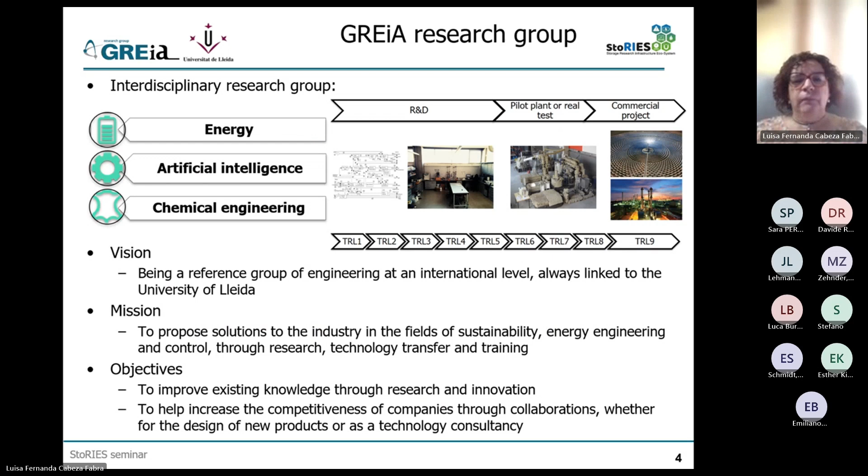These are our capabilities. I don't want to go into detail here, but you can see that we do a lot of things. And although we also look at other applications, thermal energy storage has always been our main drive.

So let's start with the presentation itself. I will talk a bit about thermal storage and their technologies, and then the role of this technology in the energy system, because I think it's very important to understand how this impacts things, and how the materials need to always take into consideration this application side. And at the end, if we have time, a bit about sustainability and social aspects - both of them, but especially sustainability, again, because it's very much related to the materials.

So we need to think a bit about the energy system. We need to remember that the energy system has three main sides to it: production, where we produce the energy carriers that we will use later - and here is where renewables are starting to have a big role, trying to substitute the fossil fuels that by excellence have been oil, coal, and gas. Then we have the distribution and transmission side of our energy system, which is where we transport this energy that we produce somewhere to the demand side, which is where our final users are.

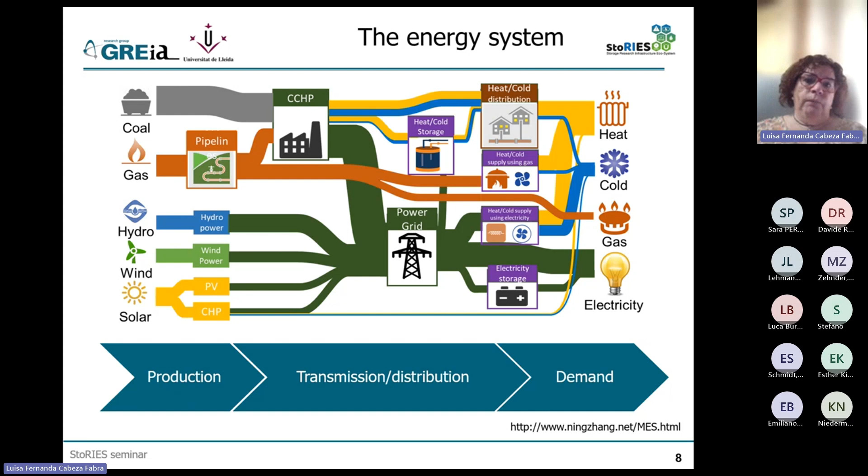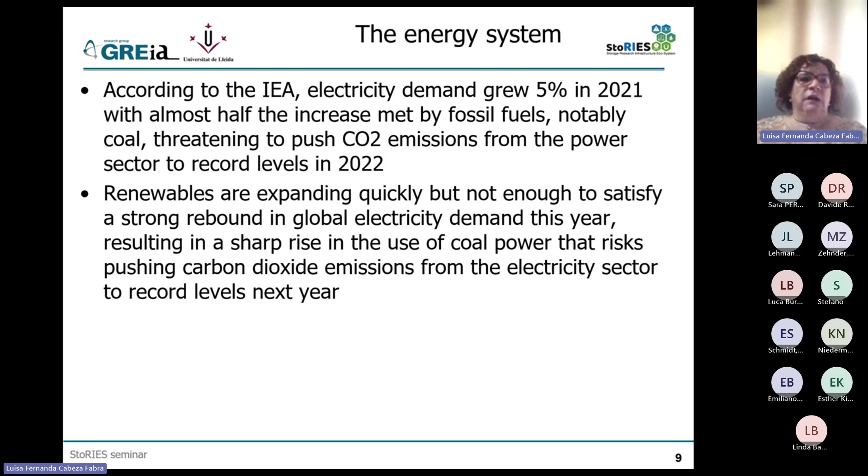We all know about this - I'm going to go quickly - but all of these technologies on energy storage, and also thermal energy storage, are being pushed very much by our energy transition towards renewables, and the problem they have is that they are intermittent.

Also, we need to remember about all our targets that we have in Europe, but also worldwide. The European Green Deal is just one example developed in Europe, but I think a lot of countries all over the world are also going into this decarbonization of our system, and also of the energy system. Again, if you read here, what are the goals of this - being the European Green Deal just an example - it talks about secure and affordable energy supply, but it also talks about energy efficiency.

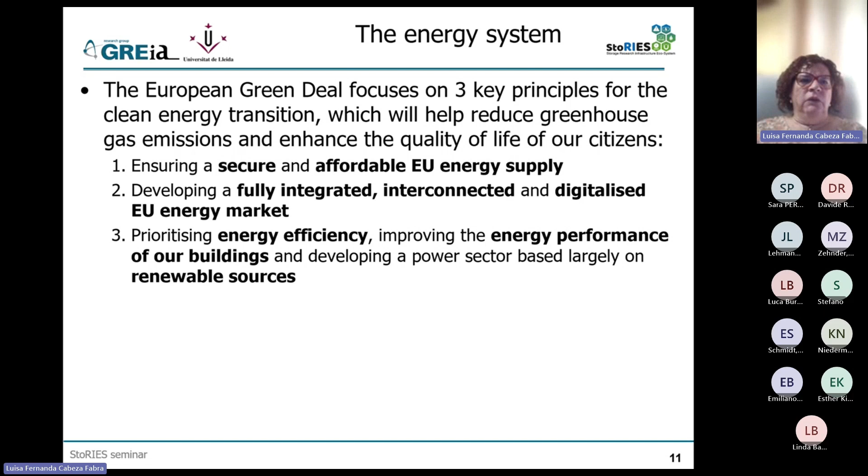It talks about energy performance of buildings, and therefore behind it - and that's why it's called Green Deal - there is all this concept of sustainability that, again, we need to consider when we work with our materials.

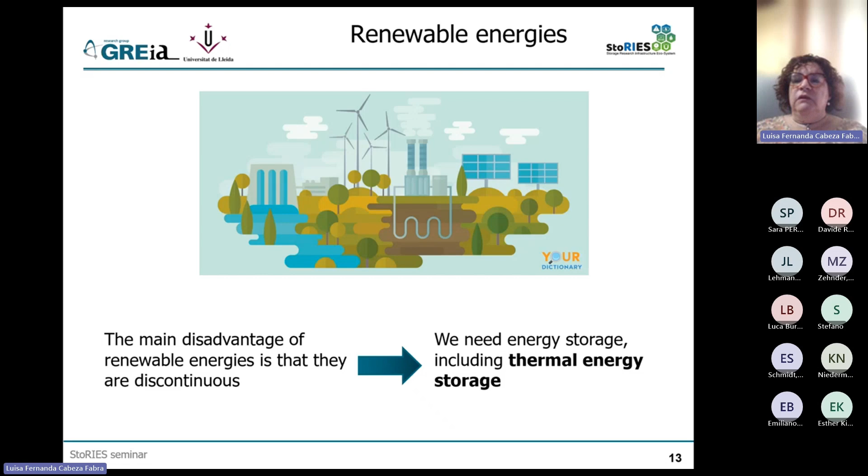This image shows you this transition that we want to do. As I said before, the main disadvantage of these new energy sources we want to use, which are renewables, is that they are intermittent and discontinuous. That's why thermal energy storage comes into place. But this is not the only application of thermal energy storage, of course.

So what is in fact thermal energy storage? I would say that thermal energy storage is what we are more and more using, a heat battery. So it's a battery where instead of electricity, what I save there is heating or cooling. It's heat or cold, so it's thermal energy.

The individual technologies, as I said, can be used in different steps, but they also can be used in different temperatures. That's what we all think, since we start talking about thermal, we think about temperatures, and then we talk about low temperature, medium, and high. Of course, what we call low, medium, and high depends a lot on the application. So in a building, high temperature is around 120 degrees C, but if I'm thinking about an industry, high temperatures can be as high as 1000 degrees C.

Also, thermal energy storage has an impact in the time that I store this energy, and this is where concepts like seasonal storage appear. So maybe in my building, I will save the solar energy from the day to be able to have a shower late in the evening or early in the morning. That's short term, daily. But it could also happen that in my building, what I want to do is store the solar energy from summer for the heating in winter. This is what we know as seasonal storage, which would entail weeks or months of storage. As you can imagine, the technology and the material used in these applications are completely different.

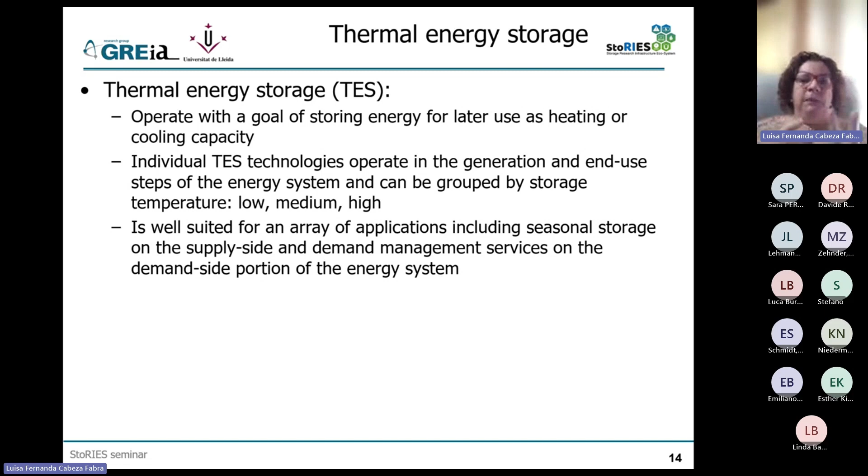Another very important principle of thermal energy storage, as in any other storage concept, is that you need to remember that you need to supply this energy into your storage and remove it. And here is where the concept of power comes in. How fast can I save this energy? So how fast can I charge my tank? Therefore, how fast can I charge my material? And how fast can I discharge it.

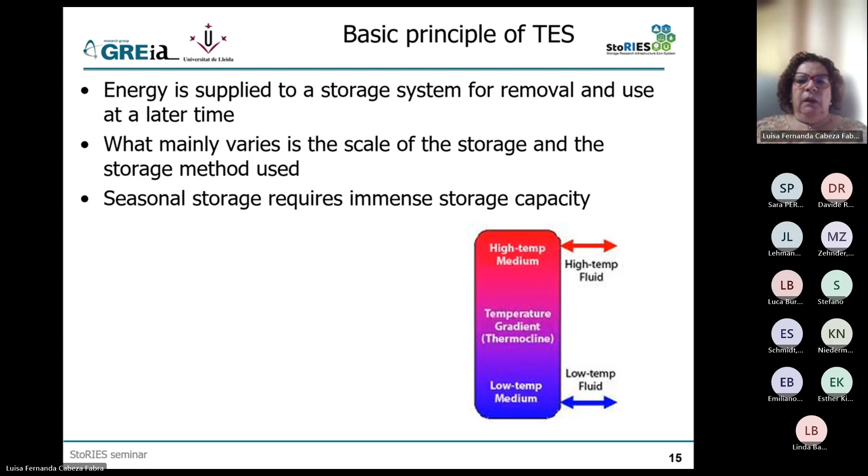And this is what we are showing here. I always say that when we talk about materials, we remember only about the middle part in the storing, where really the storage material is, and where, of course, the selection of this storage material is very important. It also is what gives my energy density. The energy density is how much energy I can store in my tank. It's related to the material itself, to the properties of the material itself. We will see which properties later.

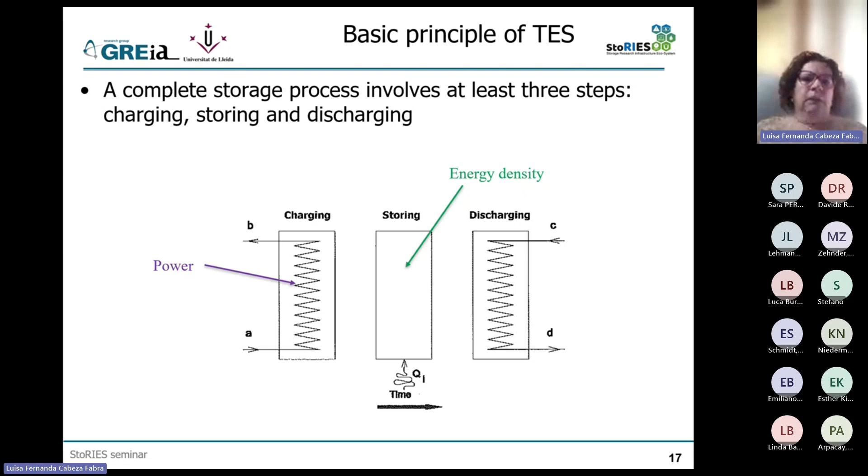But remember again that you need to charge and discharge this material, and how fast you can do that is what gives you the power of this system. In some applications, like a shower, in domestic hot water, power is very important. When I go to the shower and open my hot water, I want to have hot water immediately. While in other applications, for example in a building, if I put my material in the walls to just keep the room at a constant temperature, there I don't want power. There I like that the material stores and releases the energy slowly. So, again, when I select my material and develop my material, and when I write the requirements of my material, it cannot be done in a general way. You need to always think about which will be the application of this material at the end.

Why thermal energy storage? There are other energy storage technologies, other energy technologies in general. But thermal energy storage has some benefits that make it very attractive for engineers and for all of us. One of the known benefits is that you can increase the generation capacity of a system without really changing the system itself. Because if you are able to generate more energy and save it to use it later, maybe because there is a mismatch between the time of the energy supply and demand, with storage you increase your generation capacity without even changing your generation or your demand side of the system.

The better operation of cogeneration plants is a well-known benefit, but I think it should be extended to most other energy plants. Having a storage can help you in modulating the energy temperature, modulating supply or demand, and it really helps in the better operation of energy plants in general.

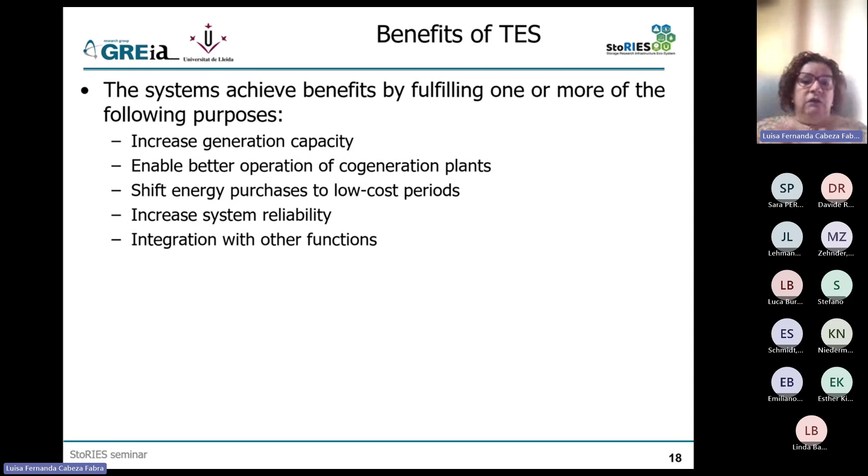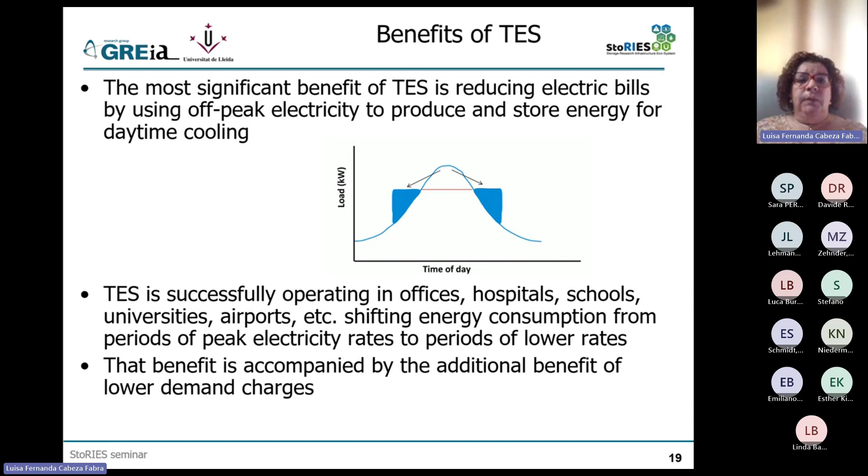This is the peak shift I was talking about, where I change demand from one time to another. If you look at the figure in front of us, this also means I can reduce the size of my producing equipment. Instead of having my cooling power concentrated in 2 hours, which requires very high power, I can produce it over more time during other hours of the day. That means I can use equipment with less power for more time, and therefore not only is the operation cost lower because I use electricity at a cheaper time, but also the investment costs are lower. So we reduce not only the OPEX, but also the CAPEX.

So if we're now convinced that this technology can help us, let's go to the technologies themselves. There are 3 technologies in thermal energy storage, and they are actually very different in how they work and the materials they use. Some of them can be used in the same application, but not always, and especially their use differs.

The most known one is sensible thermal energy storage. Here we just heat up a material to save heating—you can do the same with cooling. The amount of energy I can save is completely related to two parameters: one is a property of the material, the specific heat, which is the energy a material needs to be heated up by 1 degree C, and the other is the delta T. The higher the temperature difference between the beginning and the end, the higher the amount of energy I will save. The most known example is heating water, so water tanks, domestic hot water tanks.

But today it's also a technology used commercially, for example in concentrated solar power plants with a technology called molten salts, where what we are heating is not water but a mix of salts that undergo a higher temperature change, for example from 200 to 500 degrees C. This is also starting to be used in industry, as we will see later. So as you can see, we're starting to talk about very different materials and the way they behave—one thing is to heat water, and another is to heat and cool a salt.

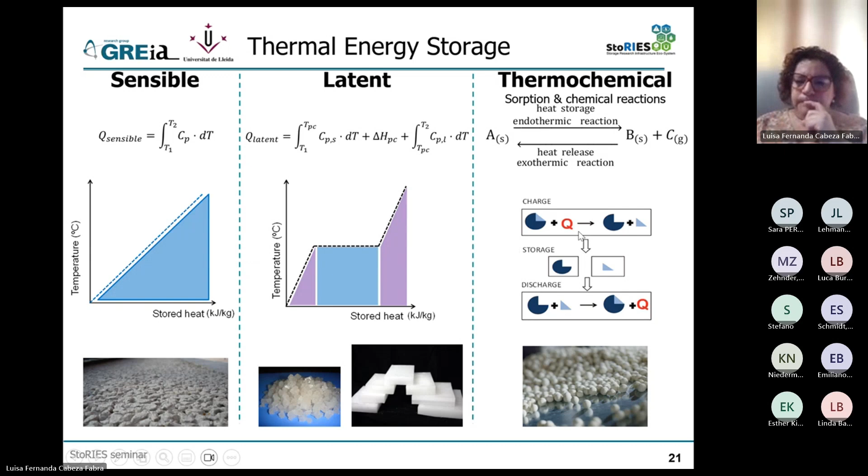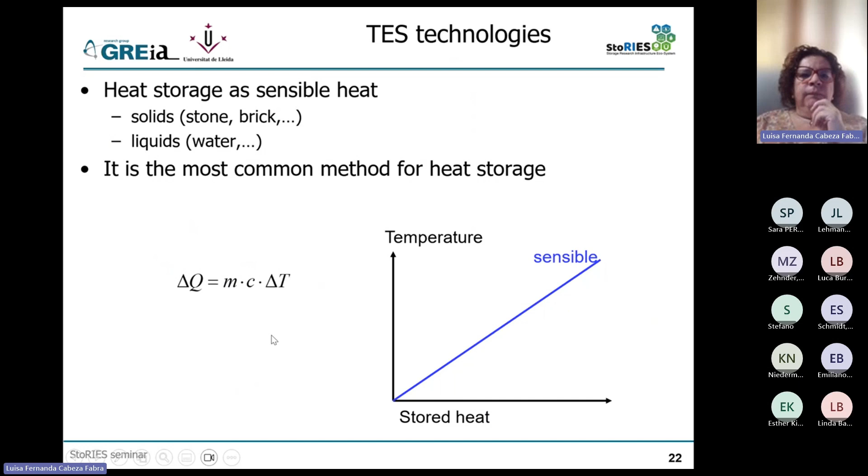Okay, this is what I said. I wanted to use that slide because it helps in comparing, but here you have more detail about the sensible examples with solids and liquids, and the equation we use to calculate the energy density of my storage. And here again, some examples, some which are commercial.

In sensible storage, for example, there is what's called underground thermal energy storage, where we use the soil as a storage material to save energy. Of course, here as researchers, from the material point of view, you could tell me, Luisa, there's not much to be done, but there is still a lot to be done in the wells that we do, especially if instead of aquifers we use boreholes, in the material of the borehole, to achieve the best heat transfer, the power of charging and discharging from my huge storage system, which is the earth itself, to my heat transfer fluid, which is what will move this heat or cold from the storage to the application, which in this case is a building, but it could be others.

Another known system for sensible storage is what's called pit storage systems. Here actually it's usually either water, or when we say pits, it's not only a big storage tank, but a big storage tank with gravel inside, so that the material is more dense and you avoid some of the problems of having only water.

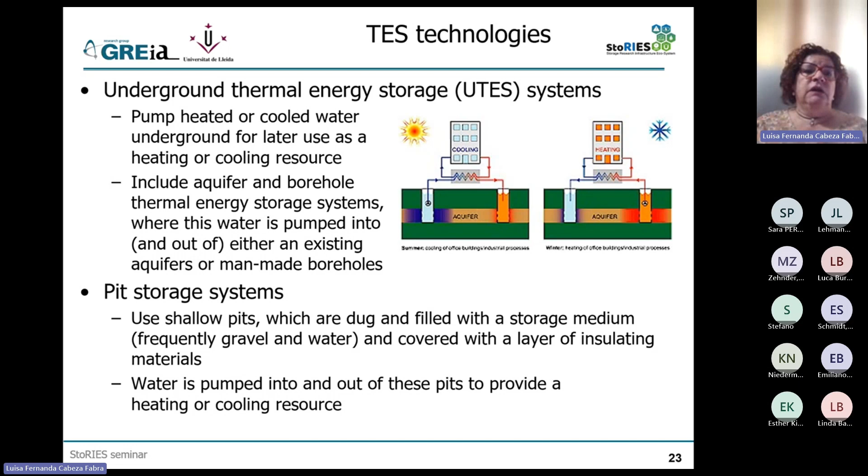Here there is a lot of research going on, because although this is a commercial system, always the same salts are being used today, called solar salt, which is a mixture of sodium and potassium nitrate. But other salts are being considered, both to improve energy efficiency, but mostly to increase the temperature of this storage, because the higher the temperature of the storage, the higher the temperature of the steam produced, and the better efficiency in the turbine side. And here there are a lot of challenges.

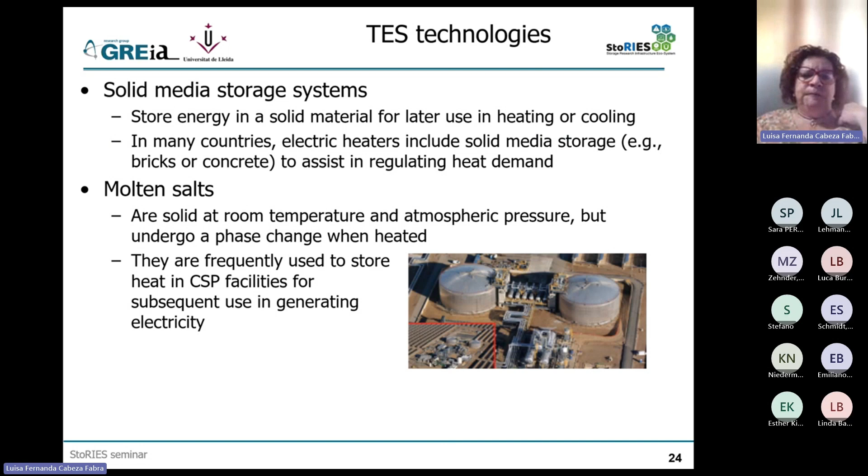Domestic hot water tanks, but also cold water tanks - this is a really common example of sensible storage. Again, this is seen as a very mature technology, but I know that there is a lot of research, maybe not in the storage material itself because it's water, but yes, in the materials used in these tanks, what materials to use to ensure durability and to lower the cost.

And this is especially important in cooling. The lower the temperature, the more challenges - this is the same as going high, okay? When you work at 100 degrees C, you have challenges. When you work at 400 degrees C, the challenges are not 4 times that, maybe they are 40 times. When you work at 1000, it's even higher. When I go down, temperature is the same story - you know that when we go down in temperature, the materials start to get brittle. So it's not easy to find materials for containers for very low storage temperature, but also the storage material here.

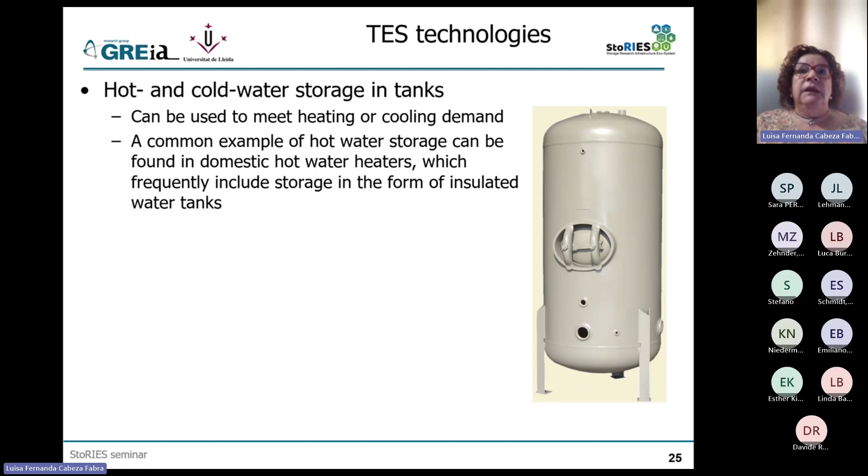Okay, there is some commercial available coolants used for sensible cooling, but to me, this is something that up to now has been a bit disregarded by researchers, and we need to go back there because cooling is becoming one of the big problems in our society, because a lot of our energy use is now becoming more and more in cooling and not so much in heating. What storage materials to use to substitute water or to go to lower temperatures? That's something where there is still little research done.

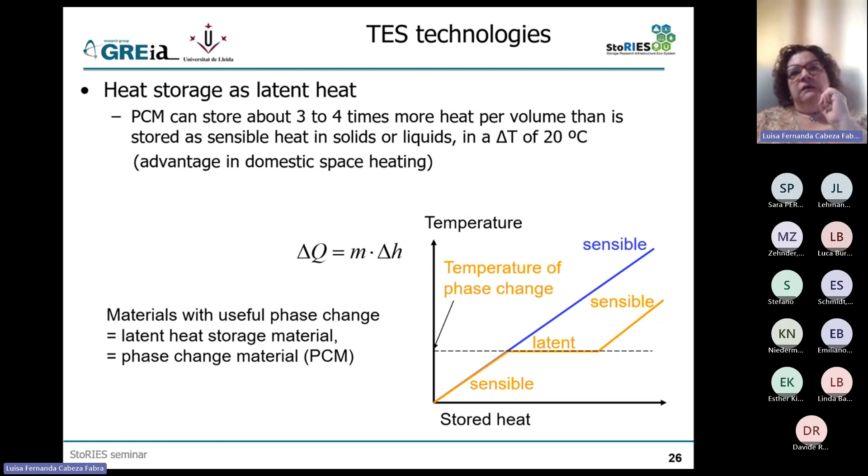Again, changing to phase change - we are talking here about phase change materials. As I said, one of the advantages here is that the energy density of the material itself is higher. Usually it's known to be at least 3 or 4 times higher per volume than sensible storage, especially for small delta T's, okay? And that's why a lot of times this technology is used for applications where you have small delta T's, for example thermal comfort, but not only. As we said, ice storage, it's mature, it's very much used.

One of the research topics in materials is using slurries. To me, slurries are a bit unique because by themselves, a slurry is a heat transfer fluid, a material used to move cooling. Usually, for example, ice slurry is water that has ice inside, so you can move it. But if we have a material inside that melts and solidifies, we're also storing energy, so it could also be thought of as a storage material.

We already discussed thermochemical storage, so I don't want to go back to that here.

Now I'll go into especially what research we have done at the University of Lleida at the material level, so you can see how much research needs to be done and can be done when you work with thermal energy storage materials.

You can work on developing new materials. As I said, in the three technologies there is a need for new storage materials for different reasons and with different requirements. But it's true that new materials are needed, and not only new materials, but also adding additives into these materials to change the properties and achieve these requirements.

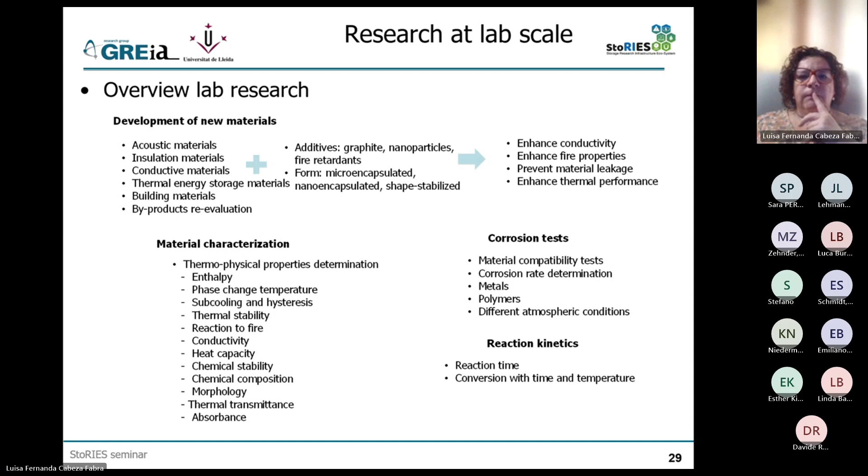So here you have some examples that we have done in the lab. For example, when I talk about bulk PCM, which means a phase change material that is not micro-encapsulated or nano-encapsulated, we have been working in mixing it with graphite and many other products to increase the thermal conductivity. We have doped our PCM with fire retardants to achieve fire requirements.

Here, to me, there is still a lot of work to be done because it's not easy, and the amount of fire retardants you have to add to the PCM a lot of times is too high. Remember, PCM is just an example of a storage material, but when I add an additive that doesn't melt at the temperature of the PCM, that means I'm decreasing the energy density of this material. So if I have a PCM and I add 50% of fire retardant or graphite, I'm losing 50% of the energy density, and that's not what I want.

So I need to get this change in the property with an addition of an additive with the lowest quantity possible. Going higher than 3, 4, 5%, it has an impact on the energy density that has to be really considered.

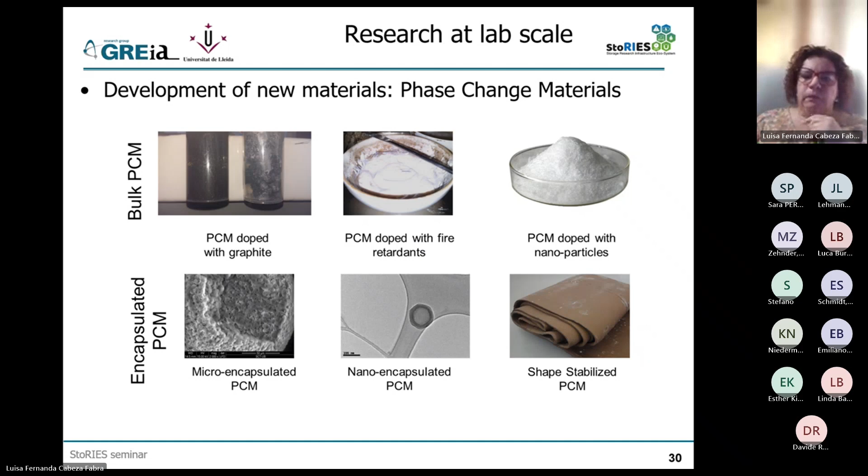We have also worked with sensible materials, adding nanoparticles again, trying to change the properties of it. Could be thermal conductivity, but could be stability. There are many objectives in that. You can do the same with thermochemical materials.

One example of developing new materials in our lab at the University of Lleida: a few years ago we worked with the chemistry department where they were producing ionic liquids, and they asked us to see if they could be good PCMs because they saw they were materials that underwent a solidification-liquid phase change. We measured them in the lab, and we were very impressed because we were able to produce some PCMs that had very, very high melting enthalpy.

When I say very high, it's 4, 5 to 10 times higher than what is a normal PCM. Why is this not being further developed? Because to produce these materials today is very expensive. But I still think this is a niche of research, because I always say that research should do things to be ready, so that when the market needs this technology, this material, we are there ready.

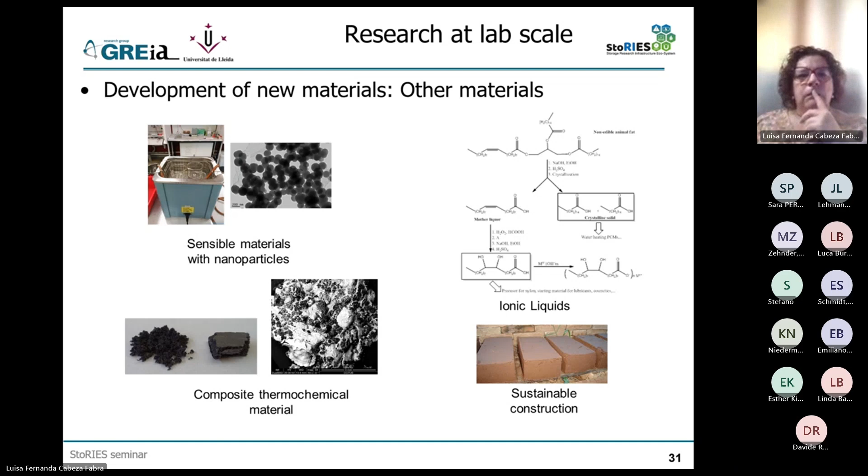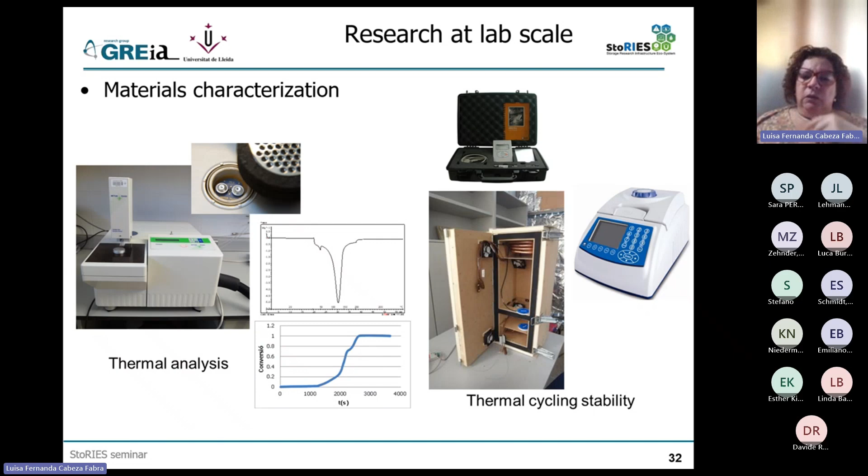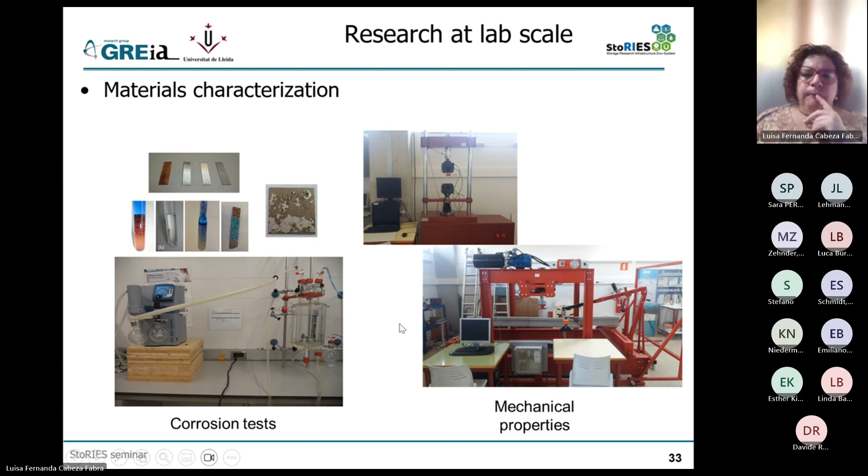It's very important for us to do this because the behavior of different materials is very different. It's very different if you work with an organic material compared to an inorganic material, which would be a salt hydrate or a salt.

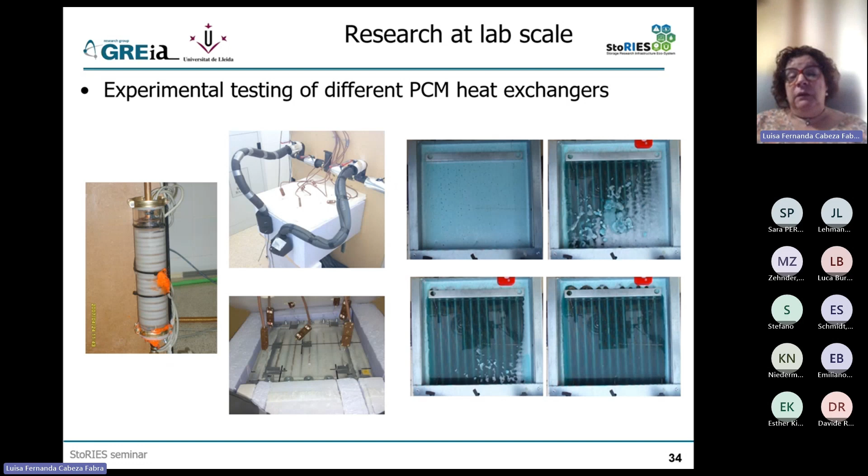So let's change the topic a bit. I want to go back to the role of energy storage in the energy system, because now that we know the technologies and materials that can be used, we can see where they can be applied in the different areas of the energy system.

This part of the presentation I prepared a few years ago, based on different energy storage roadmaps that appeared in the literature. Most of them are about 10 years old today. A couple have appeared recently, but that doesn't change the overall concept of what I want to say.

Energy storage in general, not only thermal storage, is usually used for balancing demand and supply. We've seen this - sometimes you have available energy production, like solar, which occurs at a different time than the demand, like when I need it to have my shower.

When we talk about balancing, remember it's not only about time, it also matters at different temperatures. Sometimes I have surplus energy at low temperature and I need it at a bit higher temperature. Storage can help here too - you probably need a heat pump to increase the temperature, but with storage, the whole system works better.

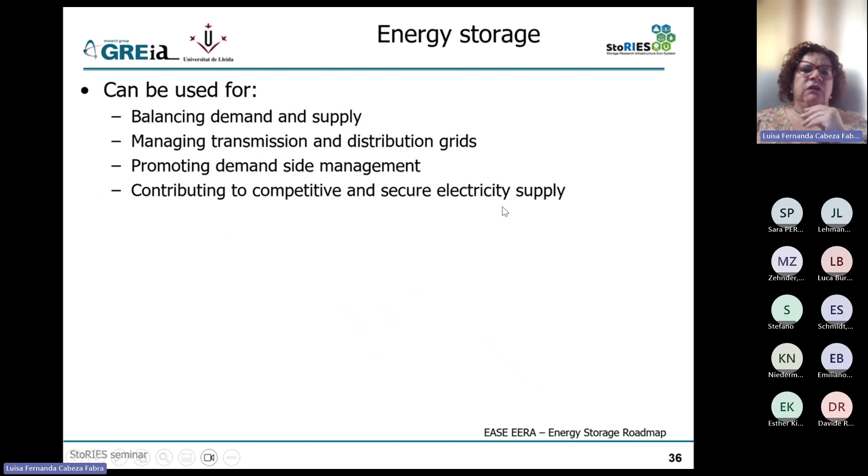We can use it for managing the transmission and distribution grids, as we'll see later. It also promotes demand side management, meaning energy use is optimized depending on supply rather than just using it whenever available. And it contributes to a competitive and secure electricity supply by adding renewables.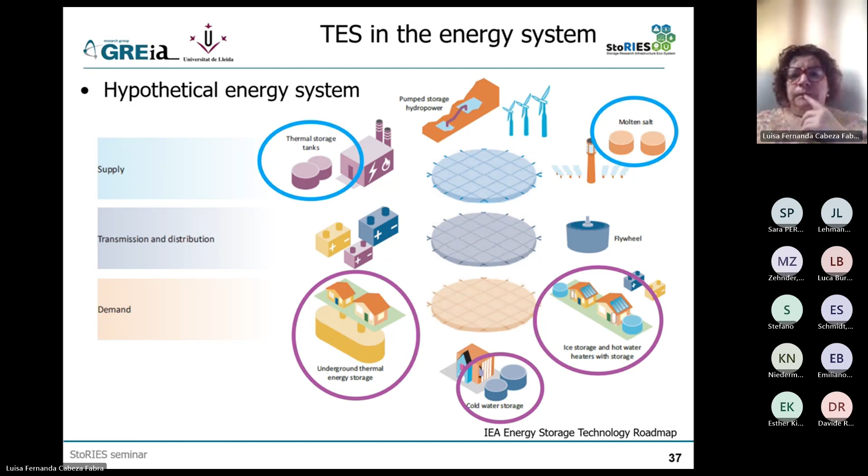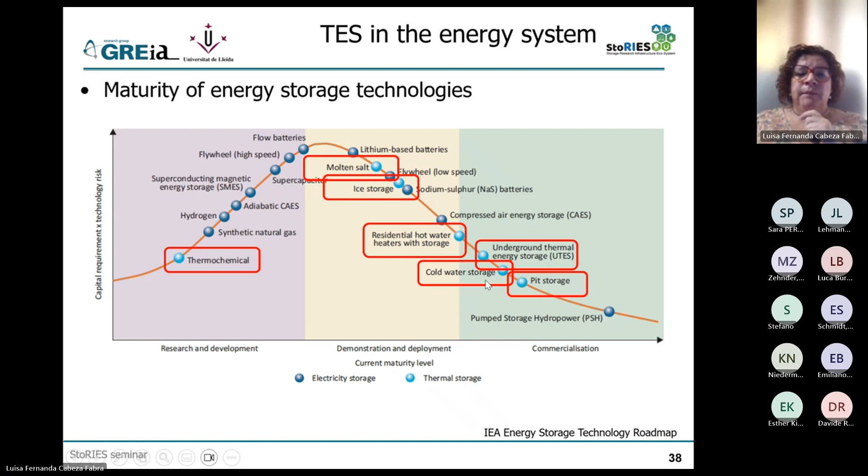One of the biggest problems of thermal energy storage is that it's very difficult to quantify the installed capacity. If I ask how many kilowatts, or mostly kilowatt hours, of energy storage potential we have with batteries, it might take some time, but I'm sure you could find it, because batteries are a commercial product. You'd go to a database showing how many manufacturing plants produce batteries worldwide and how much they produce, and you could come up with that number pretty fast.

If I ask how many kilowatt hours of ice storage exist in the world, that would be much more challenging, because ice storage isn't a product you buy in a shop. Usually it's a system designed by an engineer. So it's much, much more difficult to quantify thermal energy storage installed capacity than electrical storage installed capacity.

There have been different attempts to do that. The first was in the IEA energy storage roadmap. There's another one we did in my group in 2022, and we did another before that, but it's always a big challenge. That's also why it's very difficult to convince policymakers that this technology is in the market with a lot already installed in the world, because it's very difficult for us to quantify this.

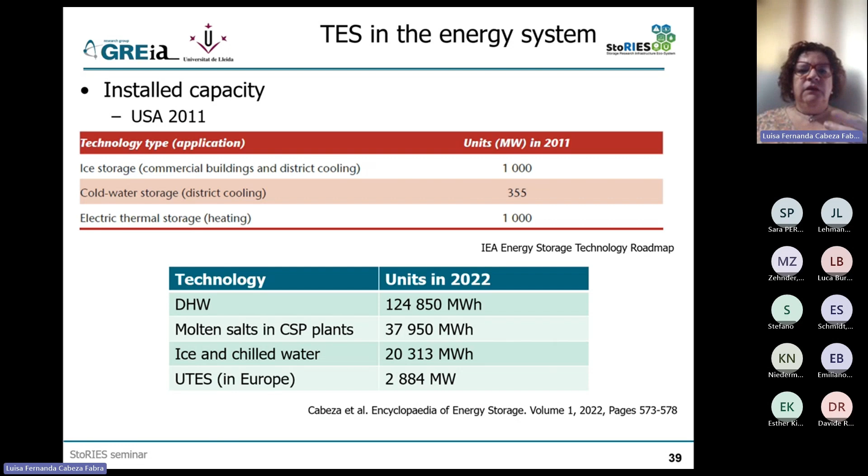But anyway, I hope you see that thermal storage can be implemented in many applications in our energy system. We all understand it's mostly done custom made, so it's difficult to quantify the installed capacities and show how many examples we have in the world.

But we also see that if I ask you now, even after an hour of talk, which are the right materials for our thermal storage application, unfortunately the answer should be: it depends. Because it depends on the application, where I want to put it at the end. And that's the main thing. For each application there are different materials, but not all materials.

This is one of the challenges: when I talk about lithium batteries, it's clear there are one, two, three materials used. In thermal energy storage, there are hundreds, if not thousands, of materials that could be used, and none of them, unfortunately, is perfect.

Again, if you guys join this seminar thinking about materials, see that I'm emphasizing a lot the concept of system, because we always need to develop our material thinking on the system and the final application at the end. If not, we will not be successful in developing something that is really useful.

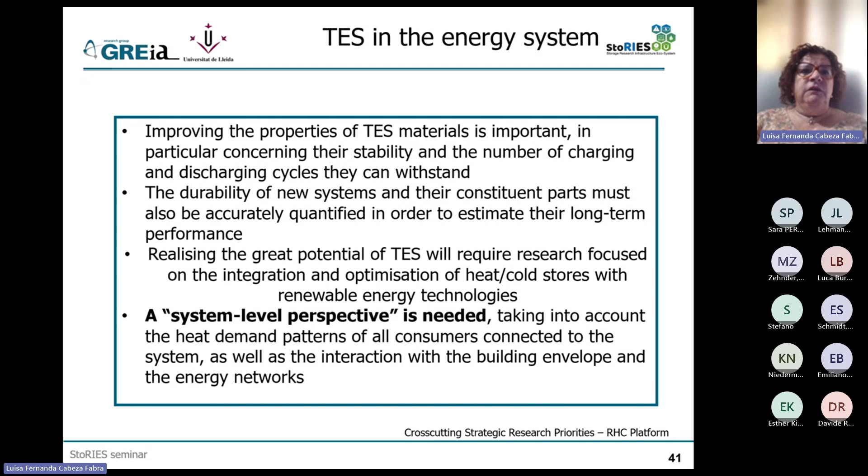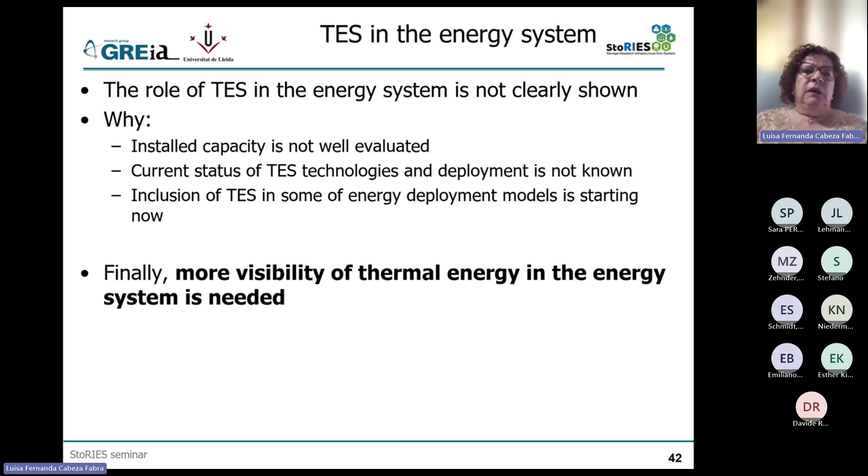This is one of my favorite slides in my talks: thermal energy storage needs much more visibility. That's why I'm always happy to contribute with seminars to explain better this technology that everybody knows about. So now a bit about applications.

I have to go a bit fast because we don't have that much time, but I wanted to give you a scope of the applications, not from the side of the technology, but now from the side of the application. I'll highlight which materials are used in each one, with examples we have done at the University of Lleida, so you can see how many applications there are and which materials we can use in each.

In general, when we talk about applications for thermal storage, we divide them into building applications. I usually talk about high temperature application, but I think this should be changed to industrial applications, because then applications for cooling would also be included. And then there are other applications that you will see - for me these are fun. It's also interesting to see that a lot of these are the ones which are really commercial today.

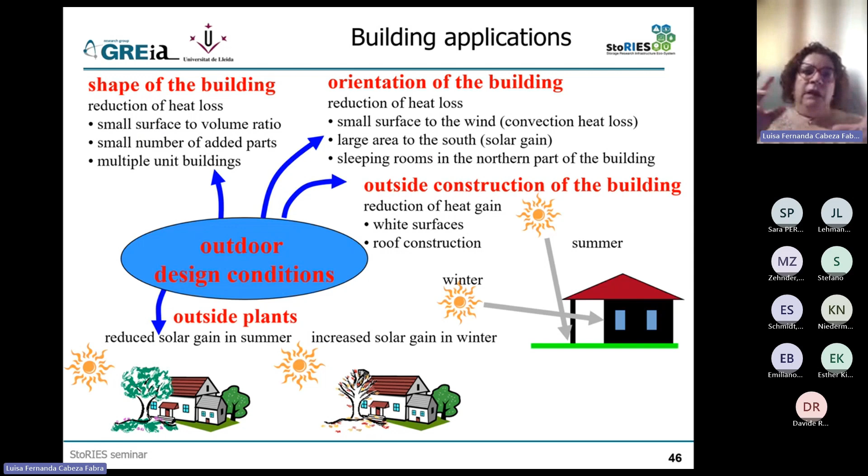Going fast to the building applications - I don't want to get into detail giving a lecture on buildings, but when we talk about buildings, the building itself and its energy performance depends on a lot of things. The first is the building itself: its shape, its orientation. The second is how we build this building - the materials we use and how we use these materials. As you can see, we already have a big challenge here, because there are many professionals and laborers working on this.

One of the main uses of thermal energy storage in building applications is to increase the thermal inertia of the building. And I always emphasize: when you use thermal energy storage, either with sensible storage, for example putting massive materials like concrete in your wall, or when you add phase change materials in your building, you are not increasing the insulation of the building. That's a mistake.

What you increase is the thermal inertia, and there is a difference. Insulation stops the heat wave. Thermal inertia delays the heat wave. So the idea is that if I'm in a building in summer or warm weather, this effect of the warm weather, usually from the sun, will get into my building, and so I will be hot inside. If I put a layer of material that helps ensure this heat wave doesn't come at noon or at 2 p.m. when the sun is there, but instead gets inside the building at 6 or 7 p.m., this is thermal inertia.

This is what we can get with PCMs. This could be very good for offices, where I'm usually there from 9 to 5. But maybe it's not such a good idea at home, because actually at 6 p.m. is when I go home for dinner. So I'm not saying PCMs aren't good for residential buildings - I'm just saying that since what you're changing in the building is the thermal inertia, you need to think about which material to put there and how, so that the effect really is the one you desire.

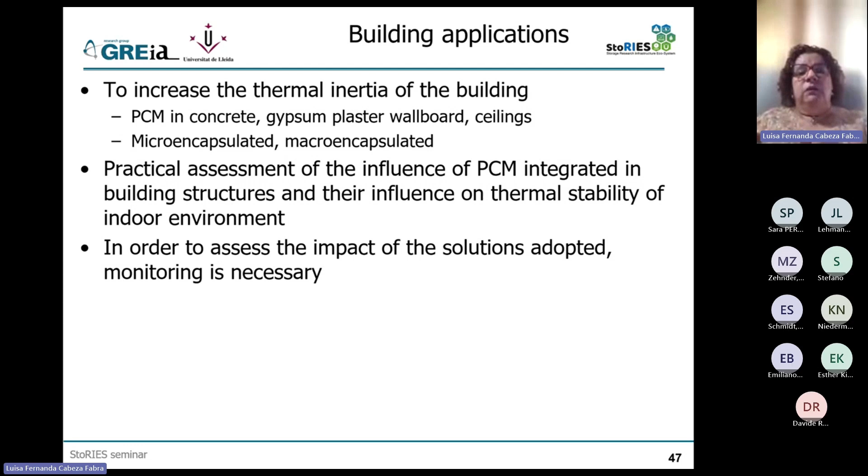At the University of Lleida, around 12 or 13 years ago, we started to build what we call cubicles—small house-like buildings where we were testing different thermal storage concepts. This was the view. Unfortunately, this setup today is still there, but it's not working. But we could take data during 12 years. That doesn't mean we don't do this anymore; we just do it in another setup.

These cubicles, which were 2.4 meters by 2.4 meters by 2.4 meters, are big enough that when you measure the temperature inside, you can extrapolate it to the temperature of a room in a normal building. And they are small enough that they were not extremely expensive to build. All of them had an HVAC system, which in most of them was only used to have a constant temperature inside the building, so as to produce energy demand, because we were testing different construction systems and building materials.

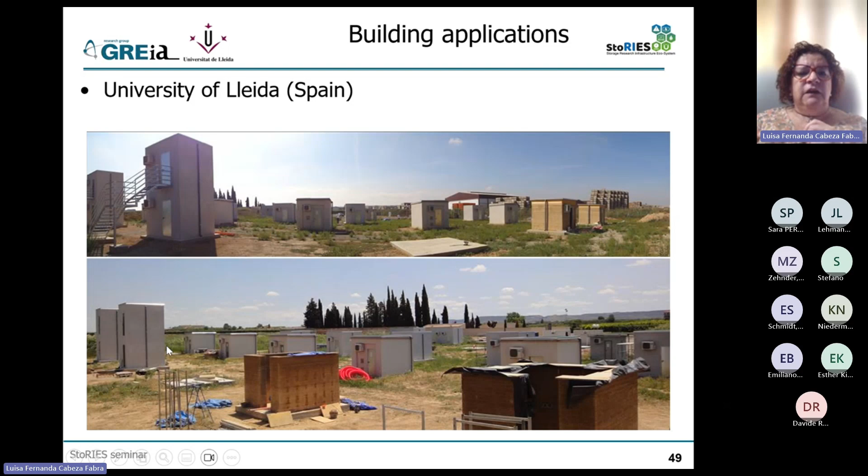As you can see here, we have adobe as an example, but we could also have only concrete, which already gives some sensible thermal storage. We were using concrete with microencapsulated PCM, and we were using the traditional Mediterranean brick system with added macroencapsulated PCM. Then, using these small cubicles and bigger ones, we were using active systems, either with ventilated facades or active systems between floors.

A little bit of detail here, going fast. As you see, these are different construction systems, adding PCM or trying to test the thermal inertia of the materials themselves. These are all massive systems—we didn't have lightweight systems at that time.

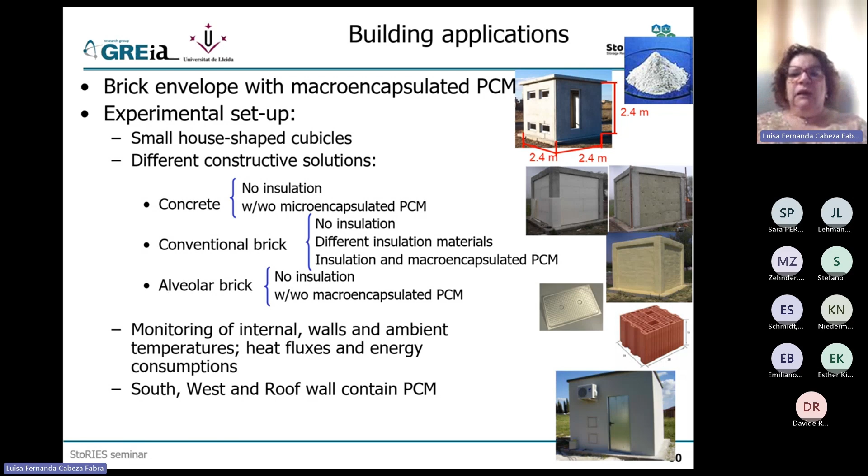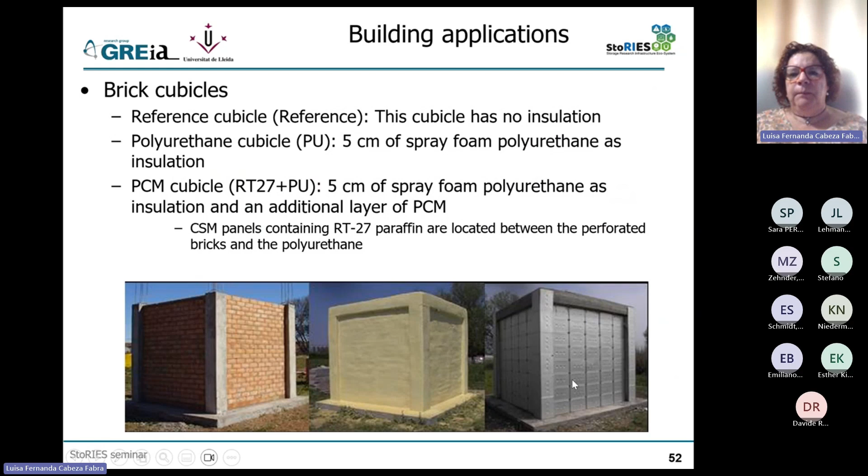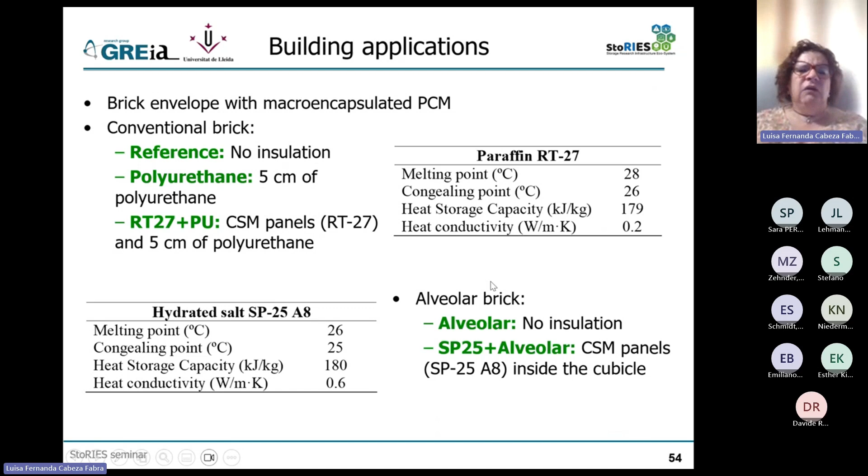What we were trying to see here is where we added the microencapsulated PCM in the concrete—these were the very first we did. And this is where we were adding the macroencapsulated PCM, these metal-shaped systems that you see added as a layer. This is the measurement and characteristics we did—all of this is published, you can find it in the literature.

So I'm going fast—heavily instrumented cubicles, of course, and this is what we were measuring. When you have a PCM, your indoor temperature changes compared with a building without PCM. The blue line is the building without PCM, the green line is the outdoor temperature, and the red line shows what we were reaching. As you can see, there are nearly horizontal lines, which is when the phase change material is melting, meaning the temperature between minimum and maximum inside the building is lower.

This is when we approach thermal comfort. There's also a delay of the maximum temperature—here I reach 34 degrees 3 hours later than when I don't have PCM. This is the thermal inertia effect I was showing you. It's not only decreasing the peak temperature, it's also reaching a given temperature later in time.

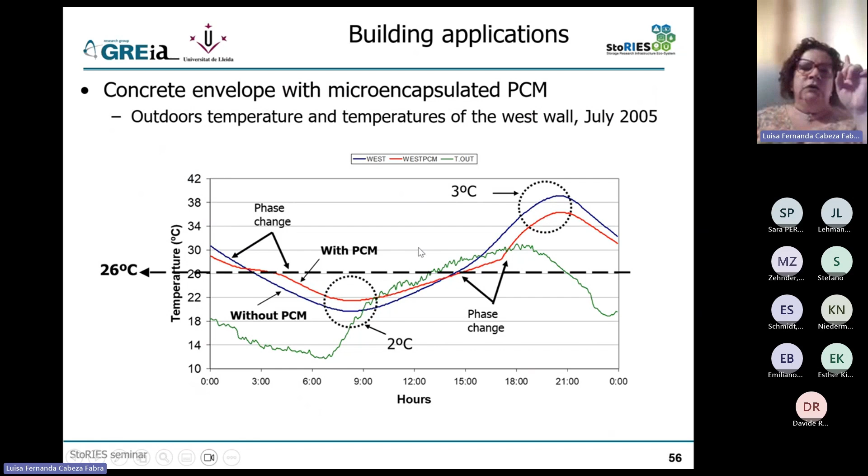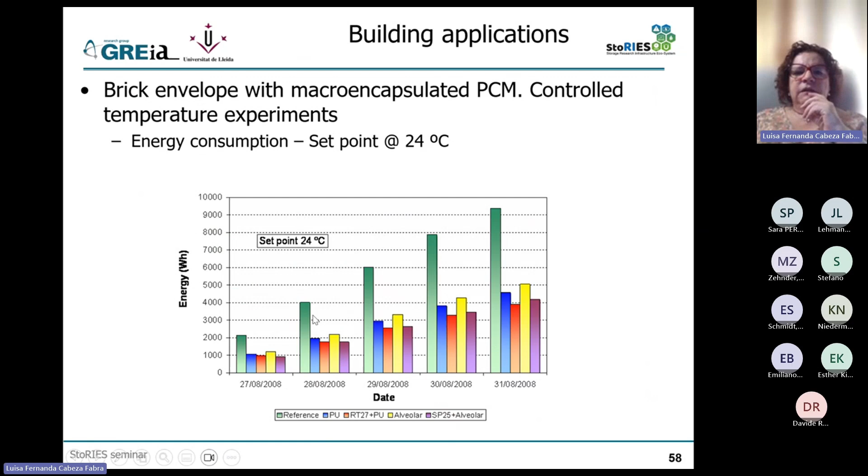This is thermal inertia. Of course, this is still not within thermal comfort values, but this was the first time—this is in 2005, nearly 20 years ago—that we saw PCM really have a positive effect in a building just by adding it in the walls. Another issue is how to control this effect, which in a passive system is difficult. That's why we went to active systems.

In a passive system, you cannot control it—it doesn't matter which material you put. I didn't mention it because I was going fast, but we were also trying inorganic materials. All of them work well, though they have different energy densities, so you have to put different amounts of material. Another issue is thermal stability. But if I want to really control this effect, I have to go to active systems.

There are different ways to do this. For now, I'll only discuss in detail this one, which is a double skin facade, but as you will see, we have tested others. Here we put the phase change material—these white things you see in this image are metal slabs with PCM inside, which we put in the facade.

Okay, we compared it to a reference system without this active facade. And then in here, we had some slabs that can open and close, and I can control where the air is moving in this facade and when.

So this is the idea in the bottom diagram. I can decide when it's very sunny and it's winter. I let the heat go into this facade with a glass, which also has very good capture. Then, because of the greenhouse effect, the PCM is melting.

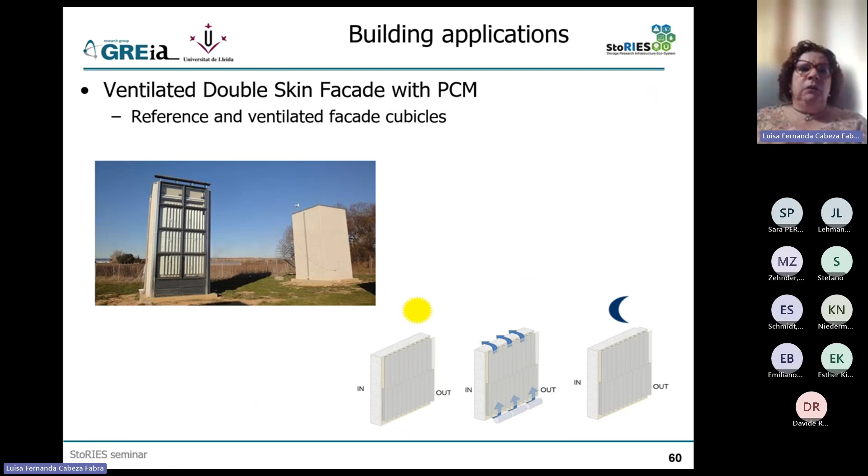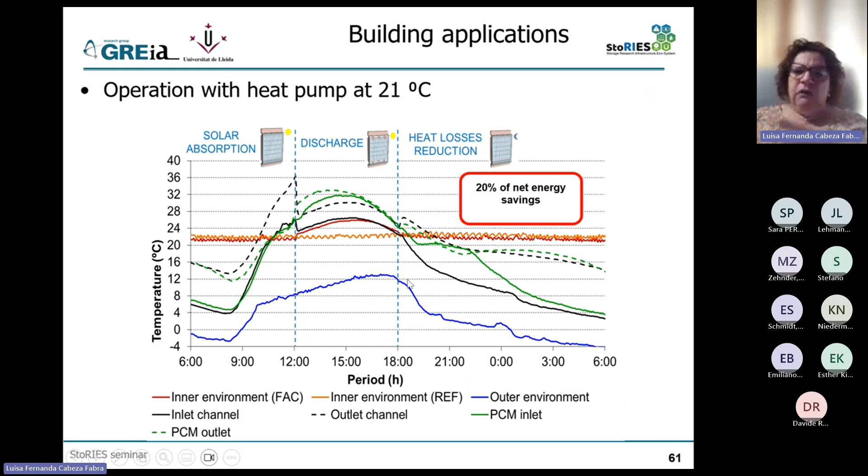These are the type of graphs that we get. Again, here you see the phase change of the material with these green lines, and also you see the energy savings, okay? I will not go into detail here. Again, all of this is published, but here again we go very much into these needs of the control.

And in each one, we selected what our simulations taught us was the best temperature, put the properties of a commercial material on that, and then calculate this average energy savings. And we saw that, of course, if you have the PCM with the perfect melting temperature for your climate in that location, your average energy savings changes, and therefore your profitability increases.

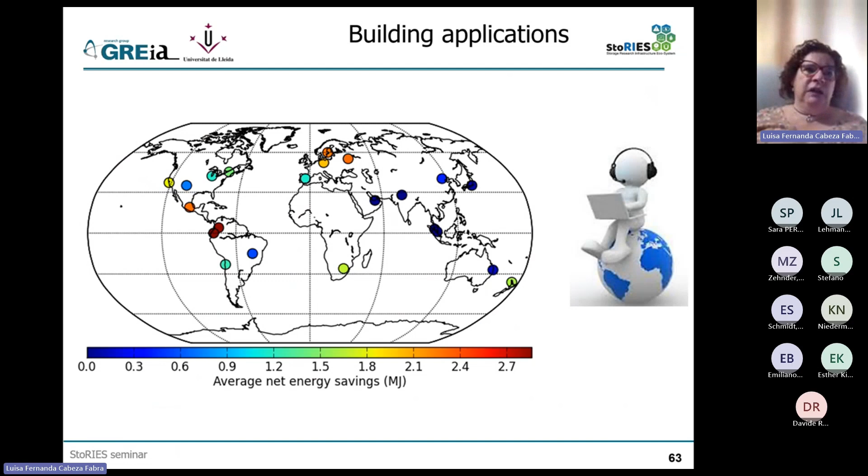So again, this is one of the drawbacks of this technology, that it's not custom made. You cannot just say, okay, use this PCM, I will tell you where to put it. It depends very much on your weather. This was done with a standard weather for several cities, but the climate can be very different in a city next to the coast versus only 150 kilometers inland.

Okay, these are the savings. And this is the part about control that we did with artificial intelligence. I don't want to spend too much time here because we don't have much time, and this doesn't have a direct relation with the material, while the sustainability part does, so I want to spend a bit more time there. But these are all the tests we did to see how artificial intelligence predicting climate and energy price can do better at achieving better performance of our thermal energy storage system. In this case, it was in a building.

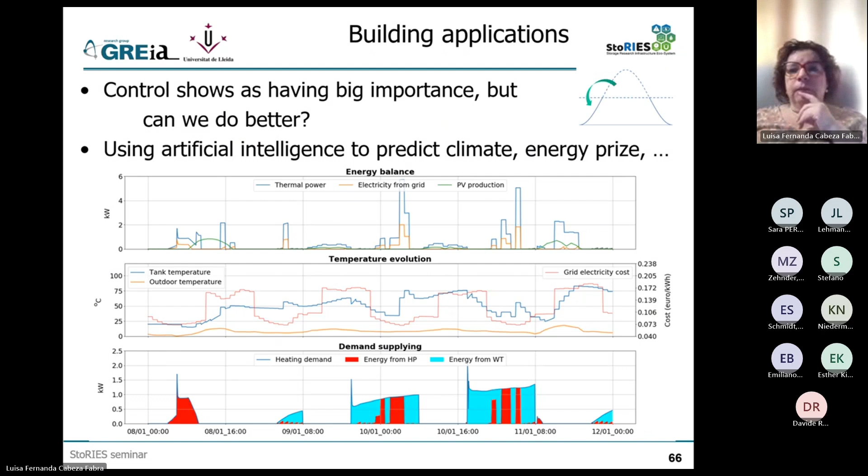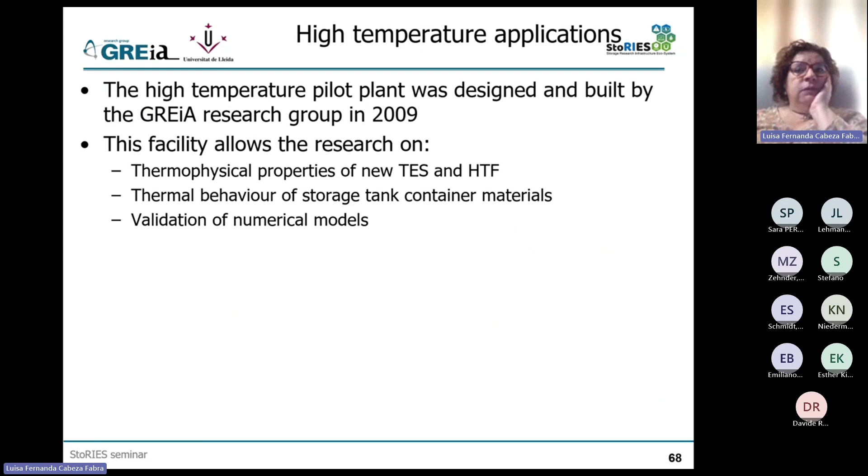Okay, high temperature applications. There are some examples here. One is this pilot plant that we built in Lleida, also at the University of Lleida, in 2009. The idea here was to go to higher temperatures, but also to higher sizes, okay? I'll go into more details later, but this is the pilot plant. You see the image in the back where we have a storage tank.

Our storage tanks were for PCMs, around 100 kilograms of PCM, and we also had 2 molten salt tanks with 1 ton of sensible molten salts, okay? The electrical boiler is the heating, it's my sun, it's my waste heat from the industry—it's where I produce the energy supply. And this air heat exchanger, this heat transfer fluid heat exchanger, which is the box you have here on the right, is what simulates my energy demand. So when I discharge my storage tank, I do it through the demand that I can simulate in this heat exchanger.

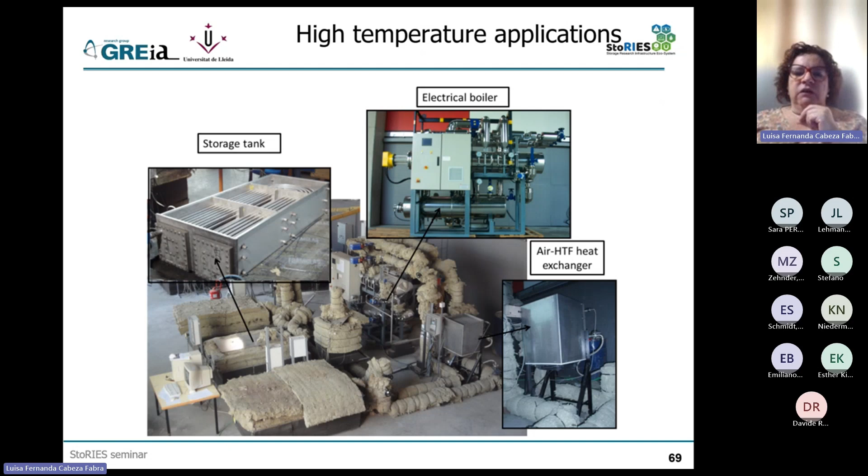As you can see, we tested many materials—well, many, considering that this research is not only expensive but time consuming. But we were testing different materials to be used as thermal energy storage, especially as PCM. And also, maybe not much related to the storage site itself but still related to materials, we also tested 2 different heat transfer fluids in the pilot plant.

Let me see my slide. Let me stop here one moment to discuss materials for 5 minutes. One of the very interesting things we found when doing this test is that materials don't always behave the same when tested with grams versus with kilograms, okay? And this is something I'd like to highlight a lot, and I usually do when I talk to people working on materials. When we work with materials, we're used to doing it in the lab with very small quantities. And when we talk about thermal energy storage, where a lot of the changes are actually physical changes, the materials behave differently when they are in big quantities.

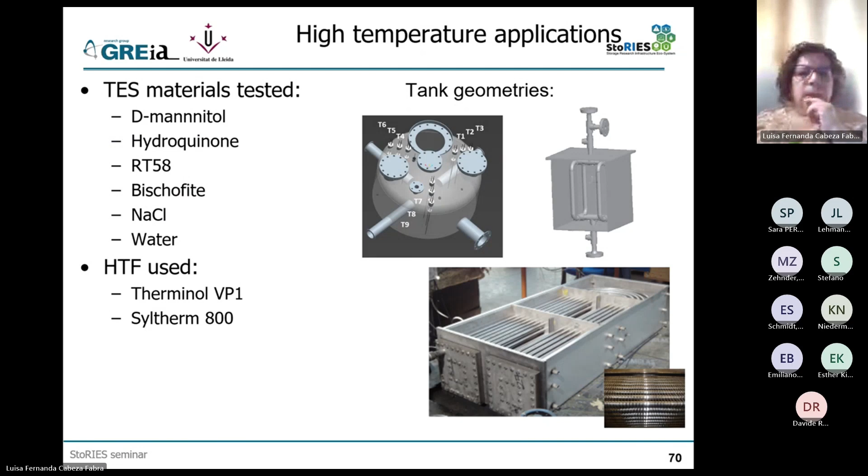Okay, I already discussed the storage in CSP and how molten salts are used. Molten salts are used, as I said, in our pilot plant. We have two tanks which are exactly the same as they use in molten salts plants, but instead of having 4, 5, 6,000 tons like they have in industry, we have only 1 ton in our lab. Here we see the pipes transporting the molten salt from one tank to the other. This part on the right is the heat exchanger that was exchanging heat with the heat transfer fluid coming from the tank. Here we mostly used the solar salts.

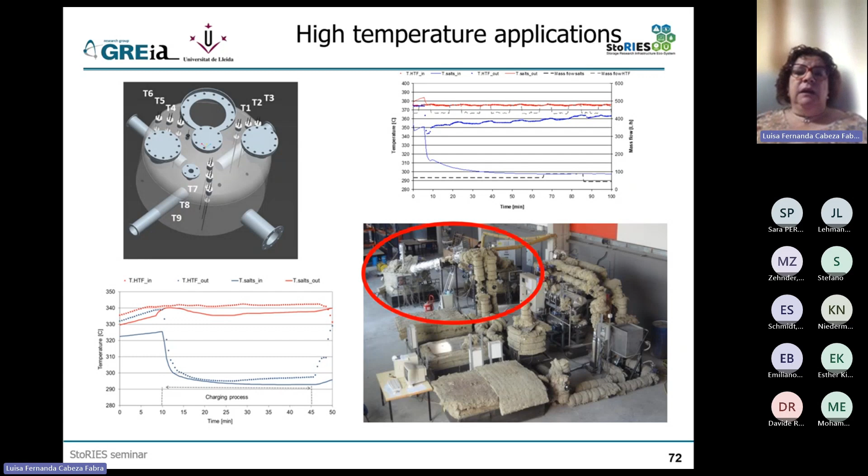But here we were very much interested in testing the behavior of these solar salts - if there was any thermal degradation, if there was any problem with heating and cooling. And at that time, we helped the industry develop this technology.

We also used byproducts, okay? And since I'm running out of time, I don't know how much I will be able to go here, so I will use this slide to show you - this is just an example. At that time we were working with Chile, and in Chile is where they produce the nitrates that we were using in our plant, which we used, as you saw, only in sensible storage, but we also started to see if they could be a good PCM.

And then the people working there told us, Luisa, in Chile we have a problem: when we produce these nitrates for any application, we also produce, in the production part - as you can see here, this is the production, mainly by evaporation - there are also other salts, usually a mixture of salts that are produced. Some of them have good applications and we sell them, but some of them, and one example is bischofite, doesn't have a very good application.

Bischofite is a material that today is used mostly as a de-icing salt. So these salts that we throw on the roads to avoid icing when it's very cold - a lot of times it's bischofite, okay? And we started to look at this material, which is mainly magnesium chloride hexahydrate, which we knew, when pure, is a good PCM, but bischofite is not a pure material.

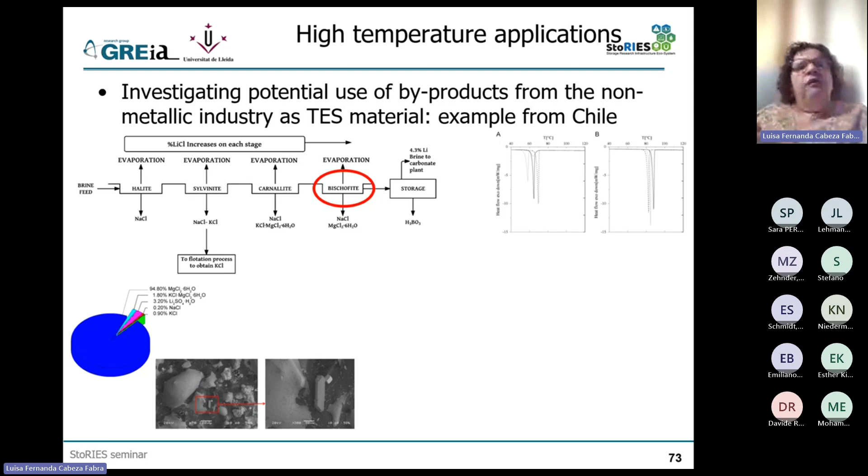So can we use this as a PCM without having to purify it? Because if we have to purify it, then it's not bischofite anymore - it's not my byproduct, it's another material. And we characterized it, and then we tested it in our pilot plant. You see the heating process and the charging and discharging, and we saw that the behavior was good.

Maybe it doesn't have the same energy density as pure magnesium chloride hexahydrate, of course, because as I told you at the beginning, if I have additives - whether additives or impurities - I will not have the same energy density. But since it's a byproduct, it's much cheaper than most of the salts that we buy and consider. So maybe even if I have to put more volume in my system, it doesn't matter because it's cheaper. And this is where I want to bring this issue to your attention in this seminar: when we think about materials for thermal energy storage, we should not always think about very pure materials.

There are applications that need that. But a lot of times looking at byproducts or waste could be also a very good thing. And then the challenges are different.

Here, my challenge is, of course, the cost. I need to make sure that if I have to buy more tons, it's still cheaper than buying less tons that are more expensive. And remember, if I buy more tons, not only do I have to buy more, but my tank will be bigger, so it will be more expensive too. So this is one challenge.

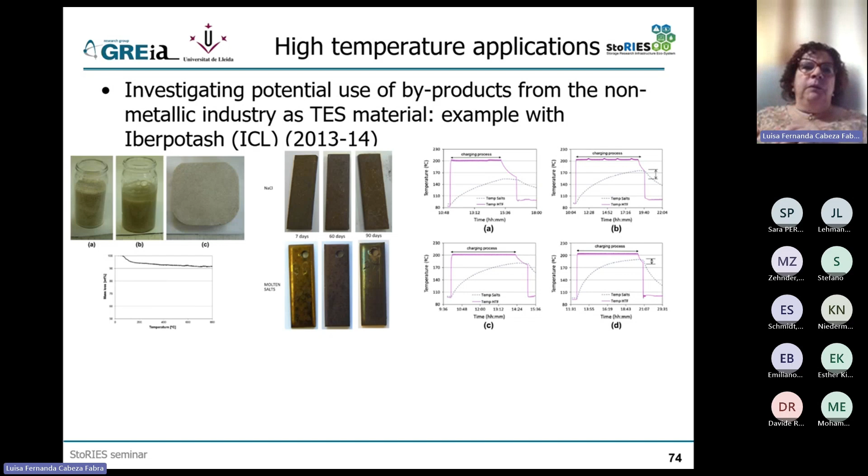But ICL itself today is a bit of a worldwide company producing a lot of salts. And as you can imagine, they are interested in thermal energy storage from the point of view of using their salts, but mostly from the point of view of trying to use their byproducts. So we are working with them to see the potential of these things.

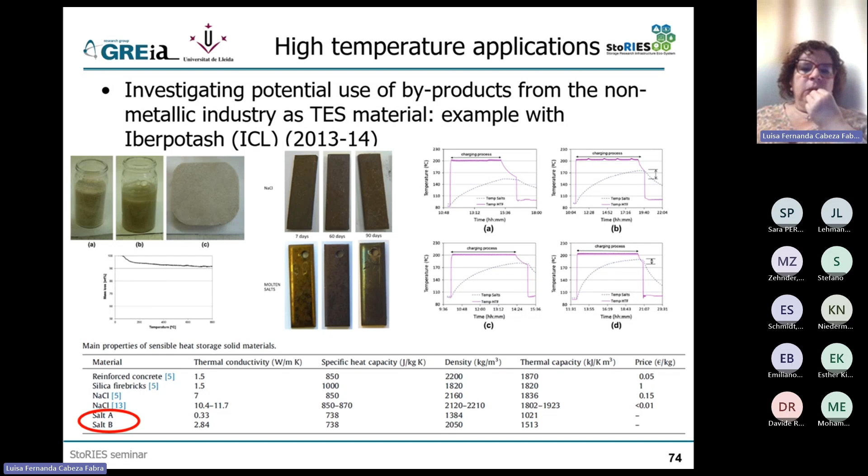This is one study that we did, and we were able to publish it. Not everything we do with industry can be published, but I wanted to bring the idea and concept to you.

Another one, we have also been working with concrete for sensible energy storage at high temperature. To do that, as I told you before, the biggest challenge is that if we use standard concrete with Portland cement, when you go higher than 400 degrees C, this storage collapses. This is why buildings collapse when there is a fire. So now our challenge is to produce a concrete that can withstand 700, 800, 1000 degrees C.

But again, here the idea is that when we look at all the aggregates we need to add to this concrete to achieve the requirements we want, the main one is withstanding not only high temperature but thermal cycles, which is also a challenge, and having high thermal conductivity so that I have proper charging and discharging power.

To achieve this, when we look at our additives, we always also test byproducts from industry. Sometimes it's byproducts from the metallurgic industry, like steel slag. Sometimes they're byproducts from mining itself. Sometimes the same cement company we are working with tells us, here are our aggregates, and there are these materials which we cannot really use in our production. Can you see if you can use it in your production, in your concrete? And that's what we are working with.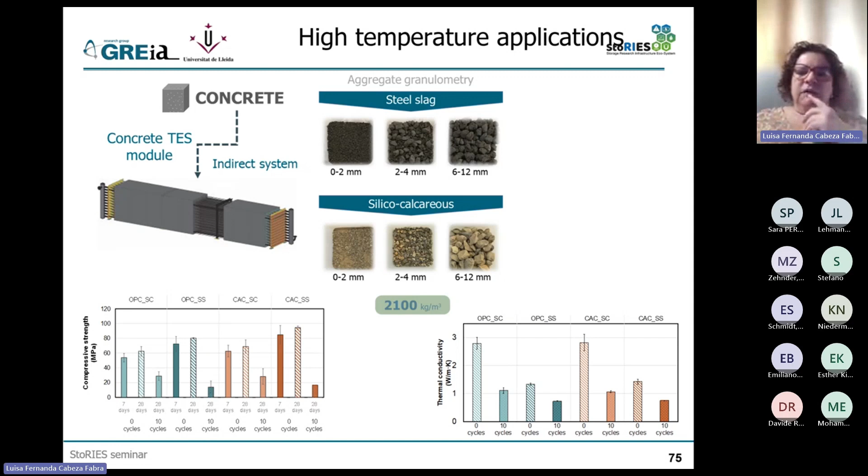This is just an example, but for instance when we have injuries in our knee, we have this pouch that we put in the freezer, and then we put it on top of our knee. Sometimes we use ice, but today there are these more sophisticated pouches. These are phase change materials.

These are materials where what we're using is the melting-solidification change. In my application, which is medicine, phase change materials are used a lot for transport of blood, but also vaccines. During COVID there was a big development because there was a need for a lot of vaccine transport, and not everywhere you have refrigerated trucks, or even where you do, it wasn't the best way. So phase change material is often used in transport of medical things, vaccines, medicines, blood, etc.

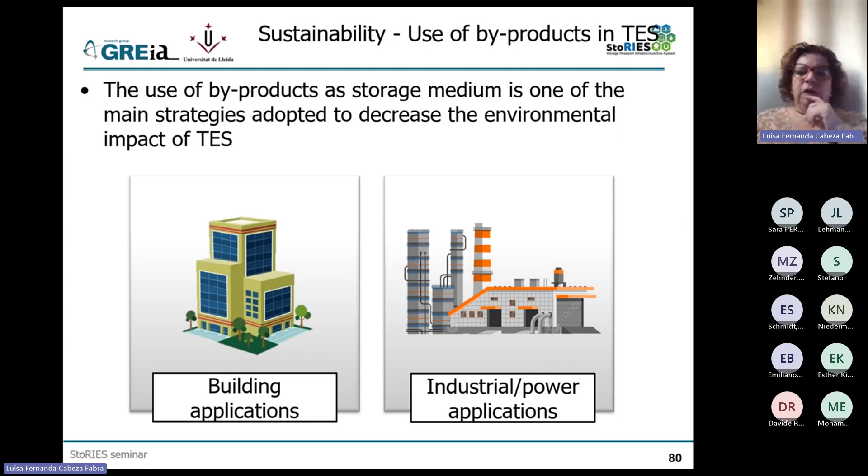So this idea of using byproducts, as I mentioned before, is very important. These green roofs - I'll come back to that - but in this case I showed you, you saw this image on the right, at the bottom, before, where I told you we developed a shape-stabilized material. But when we did this, we used a lot of byproducts. Behind the goal of this material was wanting to substitute something already in the market that's used in the building industry for acoustic properties.

So often in our buildings they put these layers of a polymer that has a lot of weight density - a polymer which inside has materials that are very heavy in weight. This is what gives these acoustic properties to the material. So at that time, we wanted to see if this material could also have thermal properties. Again, we didn't go so much toward thermal insulation, we went toward thermal inertia, putting PCM in the material.

So we did two things. First, all the material we used to give it weight density had to come from or be a byproduct or waste from industry. In this case, the final material we chose, which wasn't the only one we tested, was an electric arc furnace dust. We characterized it - it's just a black, nasty product, very heavy in weight, and that's what we mixed into our polymer.

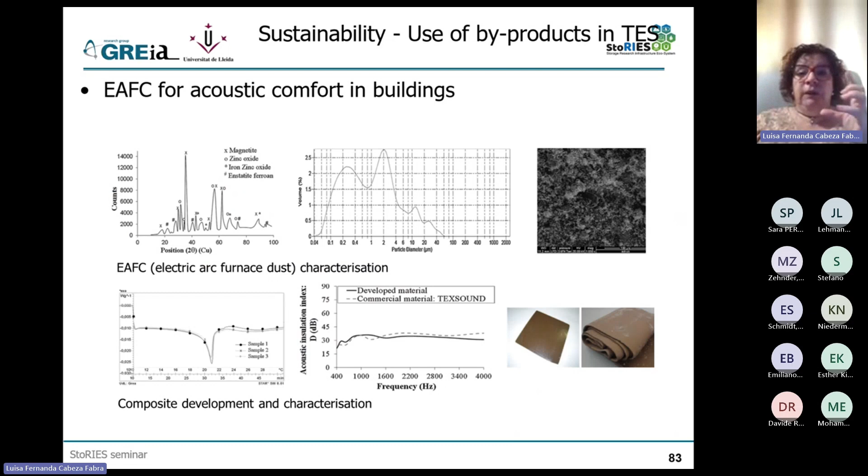And we produced this new material that we characterized a lot. Here again, talking about materials, there was a challenge on how to characterize this polymer. You can take a small sample and put it in the DSC, but since the amount of PCM is small compared to the material itself, and the polymer would not go through phase change in the temperatures we were testing, there was a challenge on how to use it, and we developed a full method with our DSC to produce this figure you see in the bottom left.

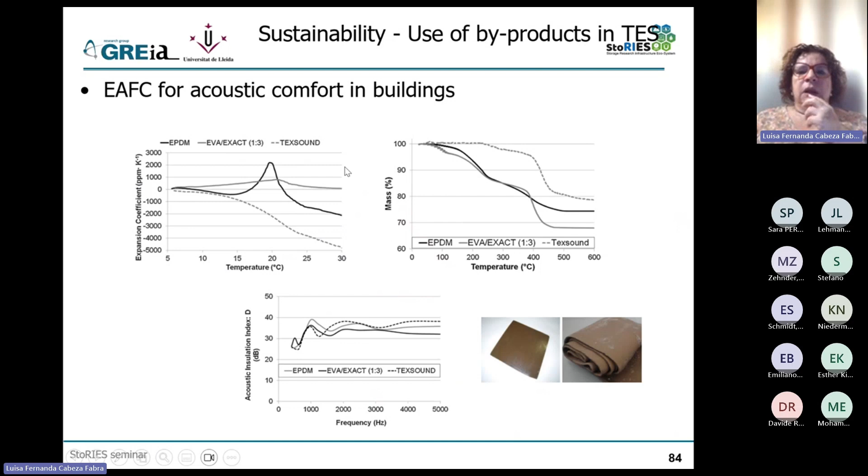And then, as I said, we characterized it completely, not only from the thermal point of view, but also expansion coefficient, the mass, the acoustic insulation, always comparing it to a commercial material, which is this Texsound. And we even went to an industry and produced several square meters, not only in the lab but in a real industry, so we saw that we could scale up from the point of view of production.

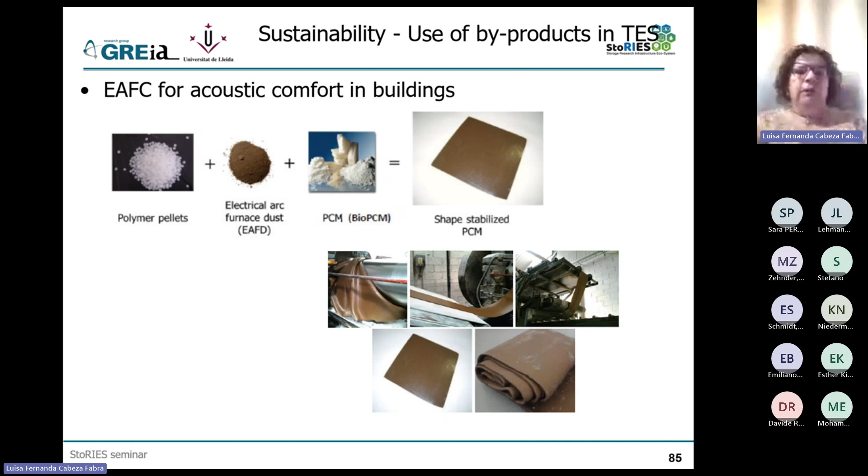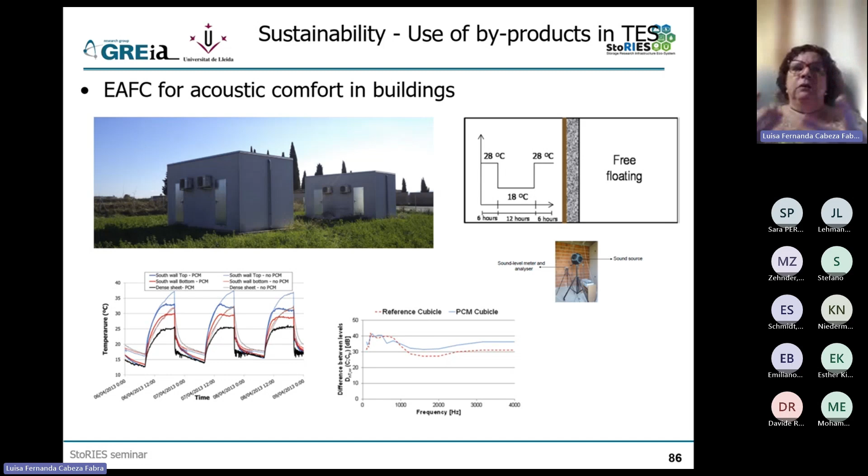This is an example, this was actually a full PhD of one of my former students, but it was really going from the lab, selecting the materials, characterizing them, producing a new material, a new thermal energy storage material with thermal energy storage properties, doing the full characterization in the lab, then scaling up in a company. We found a company that could produce the material for us, and then testing it in a pilot plant experimental setup with a building to see what would be the performance outside of the lab.

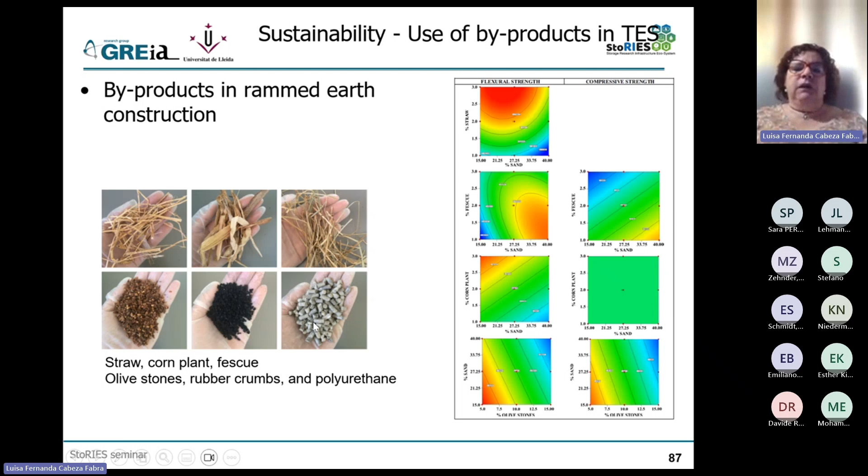Again, we tested it, we did this also in these cubicles. I don't want to go into detail, but here again, it's based on sensible performance, but trying to also get this thermal inertia effect in the building.

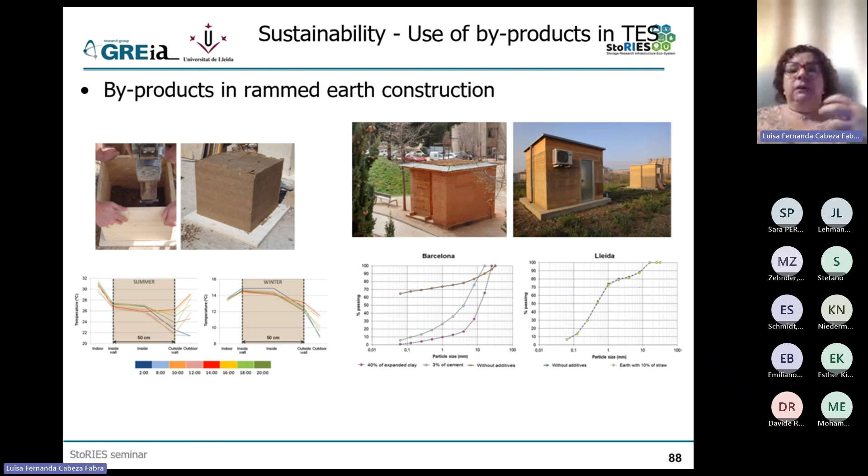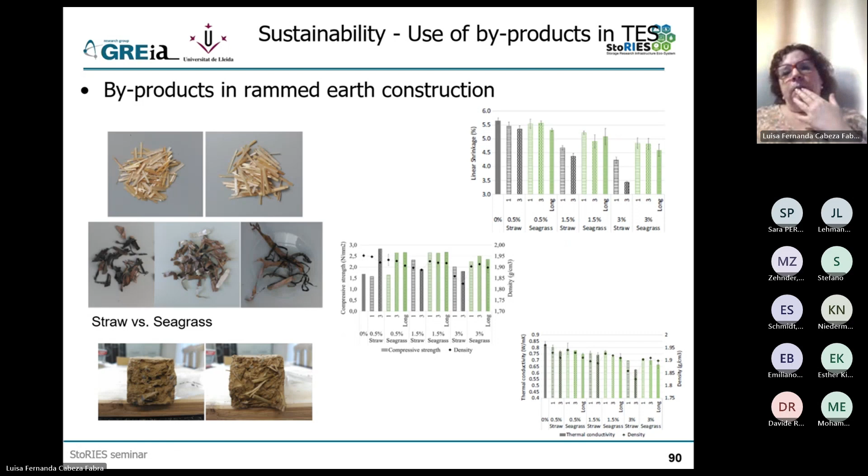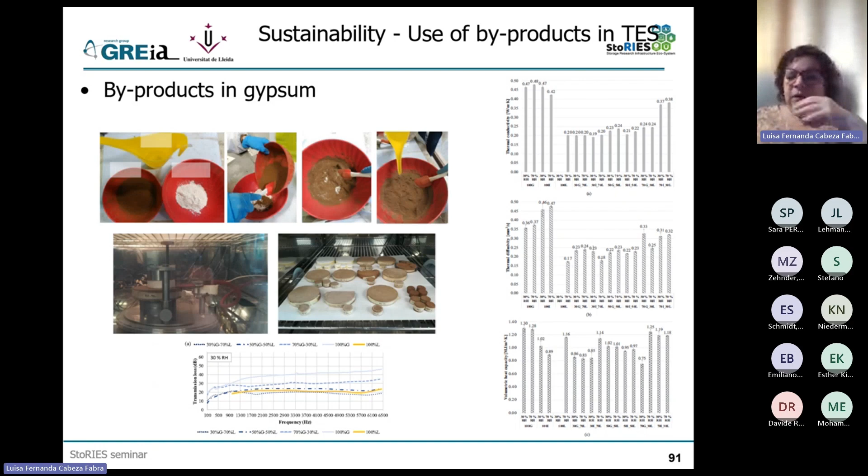Another project, over the last 3 years, uses waste from the textile industry, in this case in Tunisia, to add to mortar with and without PCM. The waste, a mixture of materials not only cotton, gives insulation to this new construction building material. We were also seeing if it's worth adding PCM, if the effect would be high enough to justify its use.

This was interesting for the PhD student doing this work. She was doing her PhD in Tunisia but ran experiments in Lleida, because in Tunisia a lot of poor people only build their houses with mortar, not even concrete. They have one-floor houses and don't insulate them. So the idea was to see if adding this cheap textile waste from industry, probably cheaper than standard insulation, works well enough.

With the PCM, it's not that cheap, but we wanted to see if the effect is good enough that the country could invest in helping people use this PCM-based textile mortar when building their houses, to get better performance and a bit more thermal comfort.

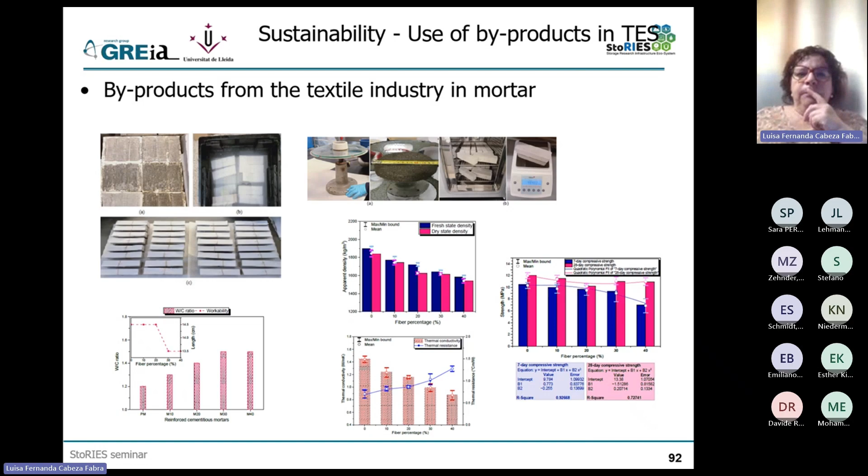Finally, and I'll stop after this, is something I already discussed with another example on materials. When developing new formulations for concrete, our aim has been around 700 degrees C up to now. The next challenge is 1000 degrees, using byproducts from different sources so that most of the material in our new concrete is sustainable, based on recycling and circularity.

So we not only have a new thermal energy storage material with a new concrete formulation and system and application—since storing at higher than 400-500 degrees C is a real demand from industry, not just concentrating solar power—but also make what we provide as sustainable as possible.

We were trying to use as many byproducts as possible, so that when its life is finished it can be reused. Now we have to test our own lab samples to see if this new concrete is truly reusable—when we smash it, can we produce either a new concrete or a new compound based on this concrete that can again be used in thermal energy storage.

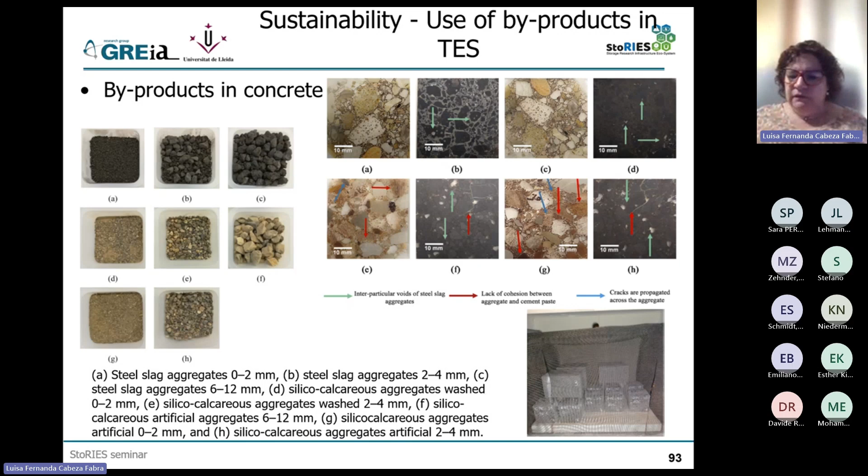With this, I'll go fast to my last slide. As I said, all the work I presented here is published. I didn't include all the references since it's a long list, but please, if you reuse any of this, look at the source and reference it appropriately.